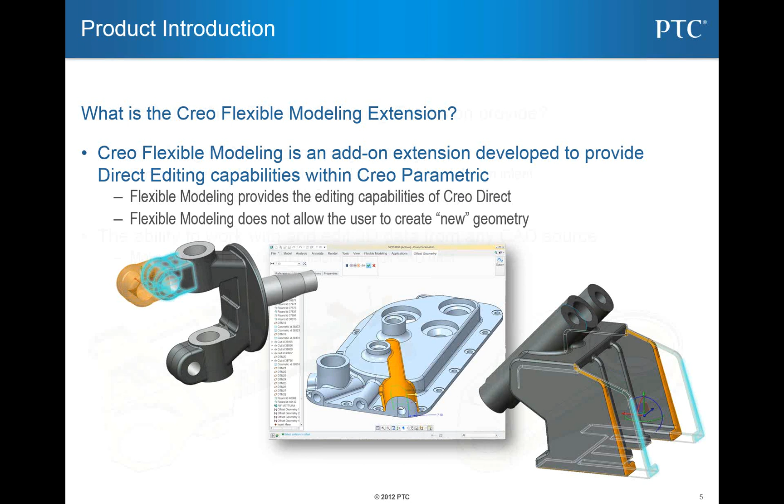Okay. Now, where does flexible modeling become a useful tool? Not only do I have the ability to alter parametric data, Pro-E and also Creo data, but I also have the ability to alter geometry from IGES files, SolidWorks files, CATIA files, whatever it may be. As all of us know, bringing in a SolidWorks file or an IGES file, fundamentally all of that is just dumb geometry.

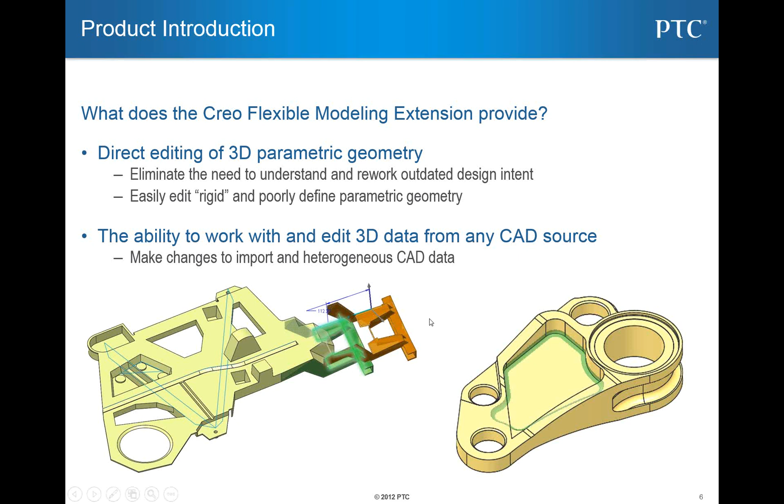So the ability to alter holes or rounds or those type of things becomes a very painful process, and that's what the flexible modeling extension helps you do. It helps you modify geometry. Again, not create geometry, but modify geometry, regardless of what type of data it is. Okay?

So where does this become useful? Again, what can it aid you in doing, right? What else can it help streamline, for lack of a better word, okay?

So a lot of us old school parametric guys are a little bit leery sometimes of the flexible modeling extension, right? But as we all know, editing geometry at a late stage in a design process can be difficult, to say the least. We've done all this engineering work on our part. We've created some type of relationship from one object to 15 other objects, and all I want to do is move that thing an inch one way. That can become hairy, especially if we're using relationships and all the other things that we can do.

So that's really where the flexible modeling comes in, is that it allows us to bypass all of those parametrics, even though we've built the parametrics into the model itself. Now, some of us will think that's a great idea, and some of us will be a little skeptical of it. But if you have a fit for it, it becomes a very big time-saving function that helps you get past something you weren't necessarily anticipating at some point in time.

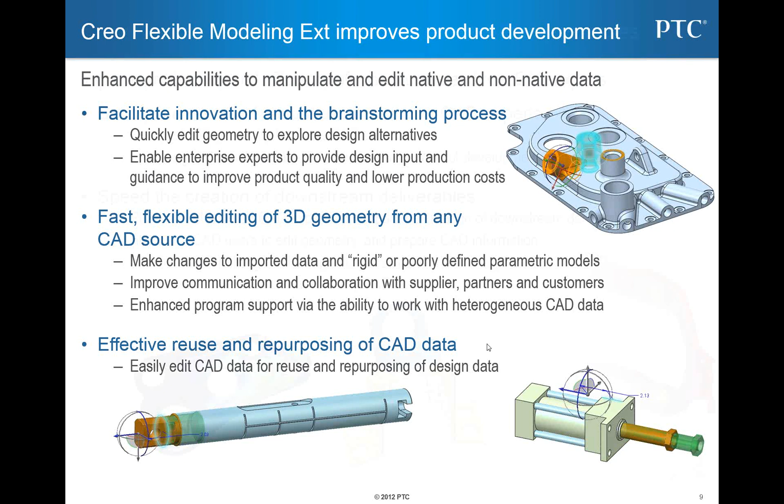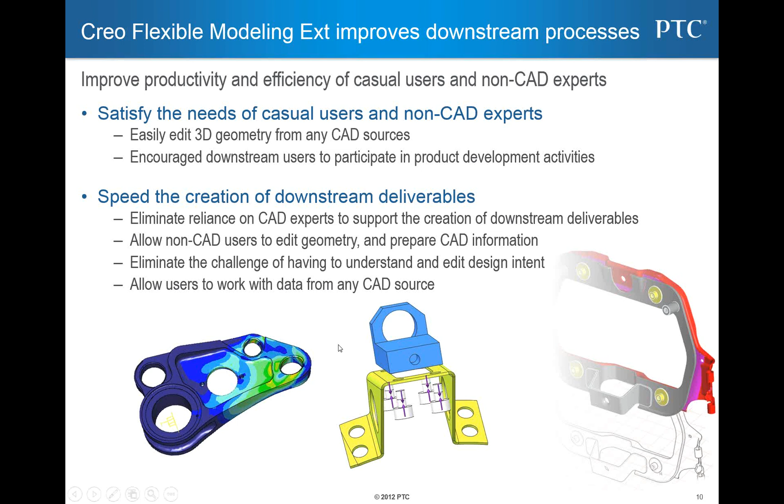All right, so I'll show some of this. This is more for the webcast, or you can pause this and read it at some point. But we'll also talk about, when we're doing some of our FEA work, we want to remove chamfers, we want to remove rounds. Whether that's parametric or IGES data, this is one of the things that the flexible modeling extension allows us to do. So just the back end of it here, and I think we're done after that.

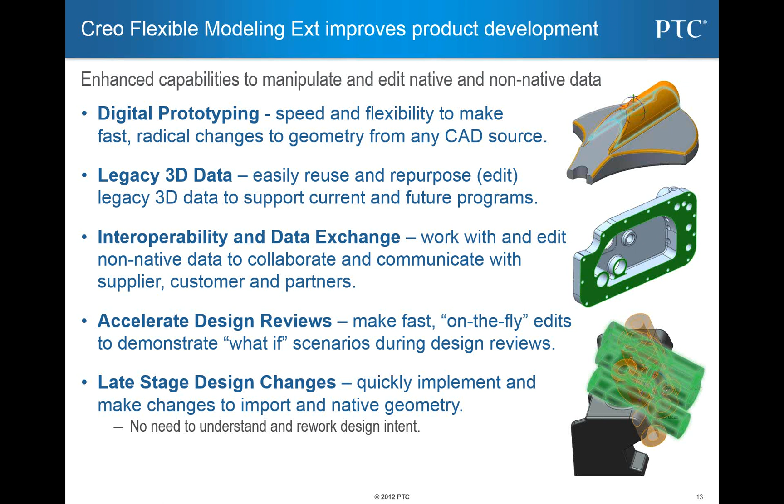So, digital prototyping: how can you change things very quickly without having to deal with the parametrics, even though we might have some in there? Flexible modeling tool. The legacy data, IGES, SolidWorks parts, whatever it may be, how you change them, that's the flexible modeling extension. So you see some of the ideas and concepts, and I told you I didn't want to bore you to death with slides, so let's get right into the software and you'll see what we're talking about and how this can help you out. I'll bring this back up at the end.

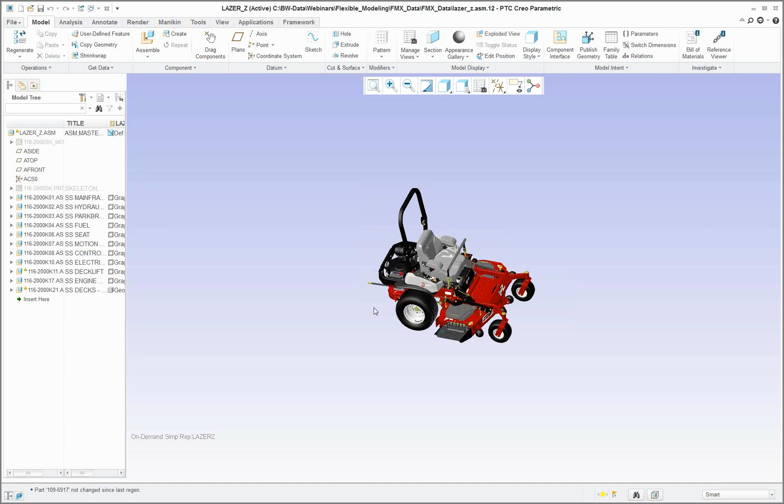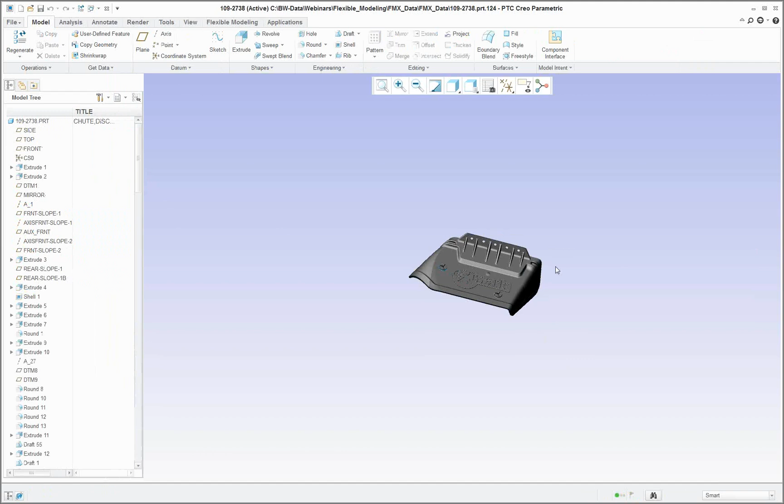So what I have here is a very typical assembly that, if you've seen a lot of PTC demos, you've seen before. It is the riding lawnmower, and it is actually a fairly detailed assembly. What I'm going to do is open this part that you see down here. There it is. And whether it's late stage design changes or whatever it may be, we're going to talk about how this works.

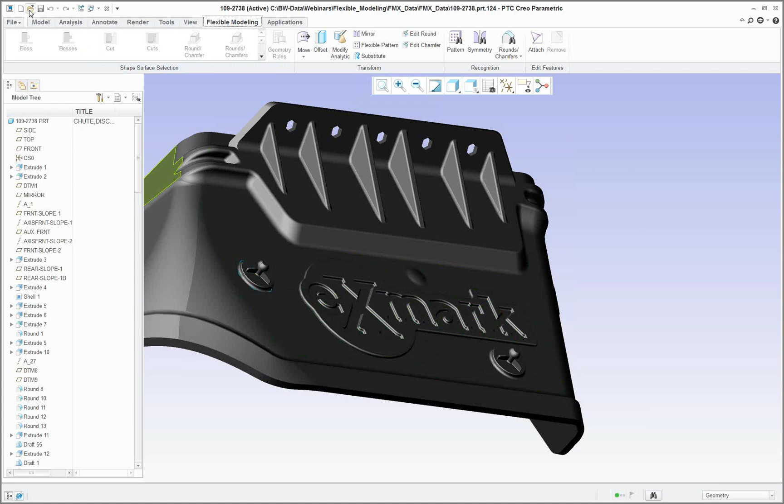What I have here is a very detailed, absolutely a Creo part, with a bunch of rounds and a whole bunch of things that go into it. And as we know, changing objects in this software, depending on what you're changing at what stage, can be kind of a headache for us. So up in the top is what is called the flexible modeling tool, with a bunch of functions. I also want to show this model because it helps us understand how things are selected and how it identifies objects when we're going to alter them. Even though it's a very simple model, it gives us an idea of how things work.

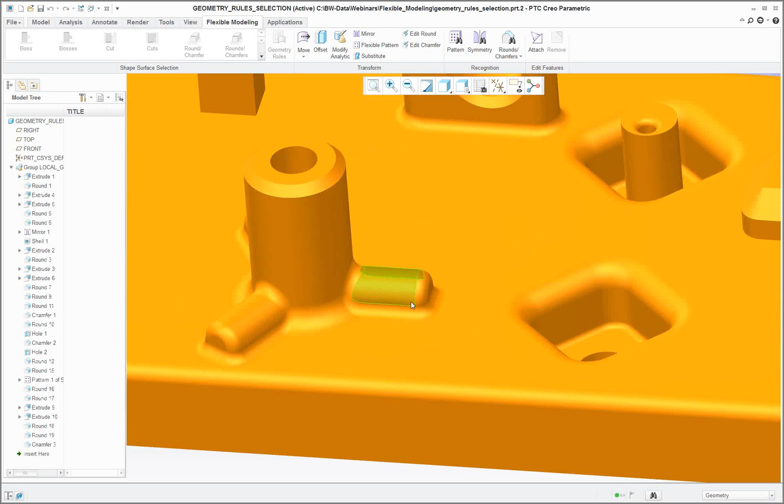Now, like we talked about before, this is another Creo model with all the relationships in it, and at some point I might want to take this entire peg right here and just move it an inch this way. Well, not understanding what all the parametrics are, and whether it's tied to this or that object, I just want to push it. So first of all, when you get in the flexible modeling tool, you pick the object that you want to move.

Pretty simple. Well, how does it understand what to pick? So what I'm going to do here is pick this surface, and what you'll see is that these guys right here start to light up and help identify things for you, okay? So what this does is it works off what is considered to be a boss or a cut idea, and then the ability to identify rounds and chamfers.

So this is more of a boss. So I want to pick this guy, and it says, do you want the boss in a simple standpoint or from the select surfaces, or do you want it recognized a little bit more? So I'll say I want the entire boss. Notice how it identifies that all the way down to the floor, okay?

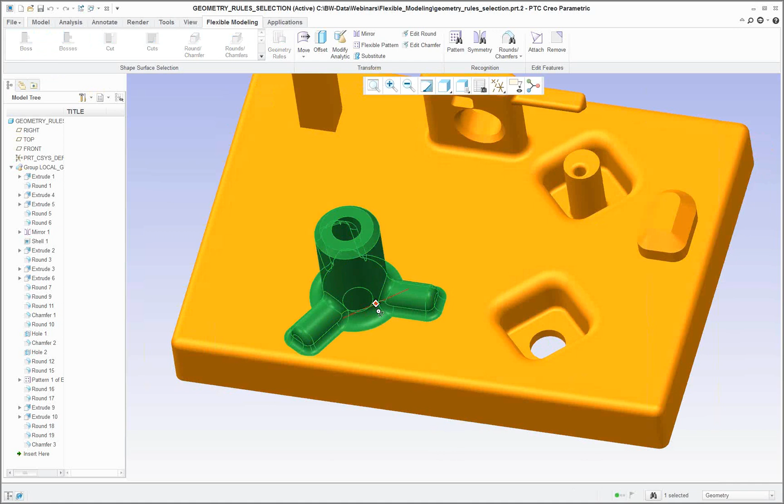At the same token, we'll look at it from this standpoint. I'm going to pick that surface right there. I'll say give me the entire boss, and notice how it recognizes all the geometry according to the boss. Now, let's say that we don't get all of it, okay? Let's say it can't recognize something because it's not perfect by any means, and I pick this guy.

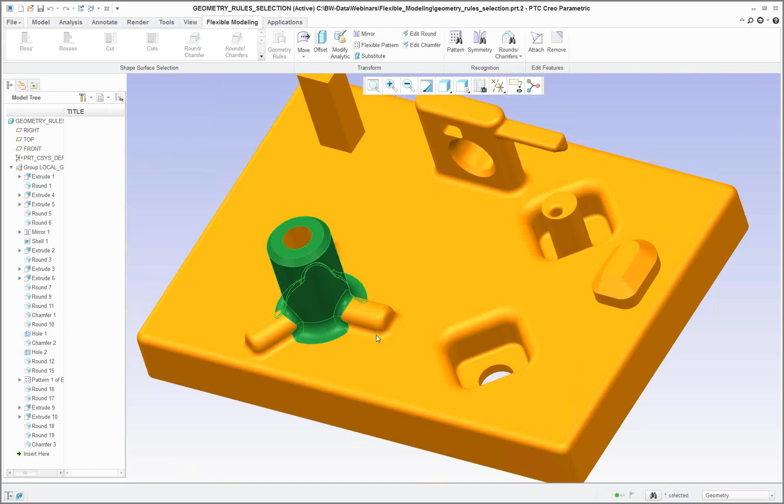I still, at that point in time, can just hold the control button and continue to pick surfaces that I want to add in to some type of move or change that I'm going to make, okay? So it's not like it's limited to the selection process that you see up here. You just hold the control button or the shift button, or for that matter, I can hold the shift button and get all of it anyway.

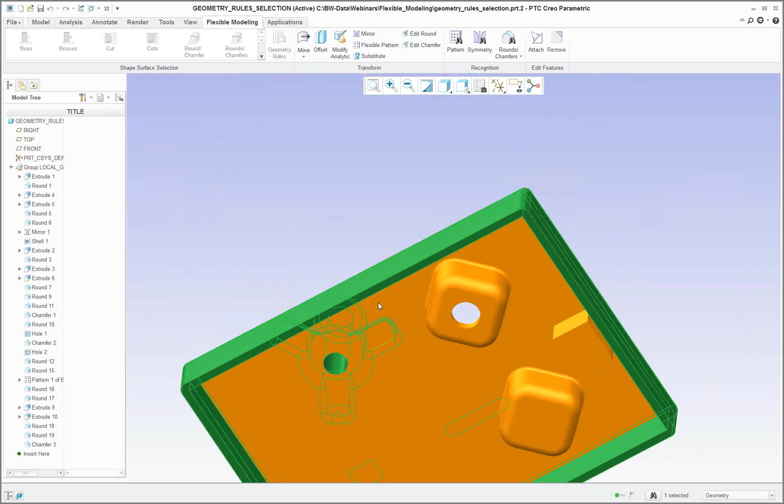Well, I guess there was a hole at the bottom here. There we go. All right. There it is. Okay. So you can still use the same concepts around the selection process and still use the flexible modeling functions, right?

But this selection of geometry becomes a big deal because, again, it doesn't always do the perfect job of what it selects, but you can always use the shift and control button to add in the surfaces or the geometry that you'd like to change, okay? So I wanted to start out with that to show you how things are selected and how we go through the selection process in general.

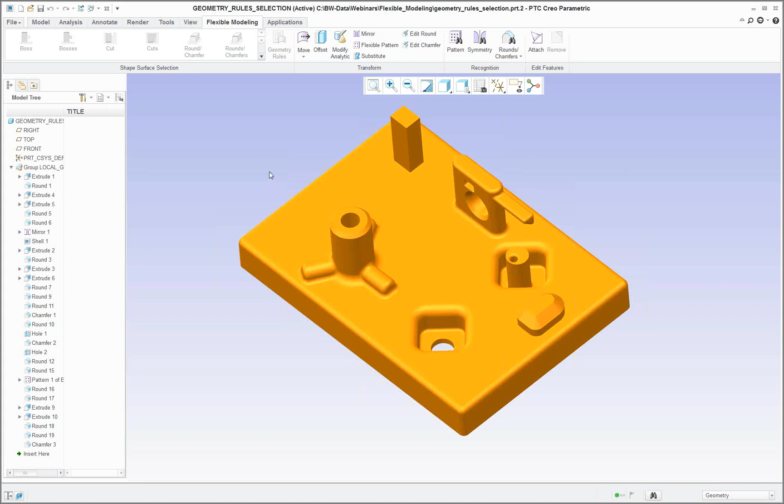All right, let's go back to that part. All right, here we go. So let's go ahead and make a change, okay? So what I'm going to do here is pick that surface right there. Let's see what it recognizes, right? It recognizes that. You know what? I want to add in the other ones.

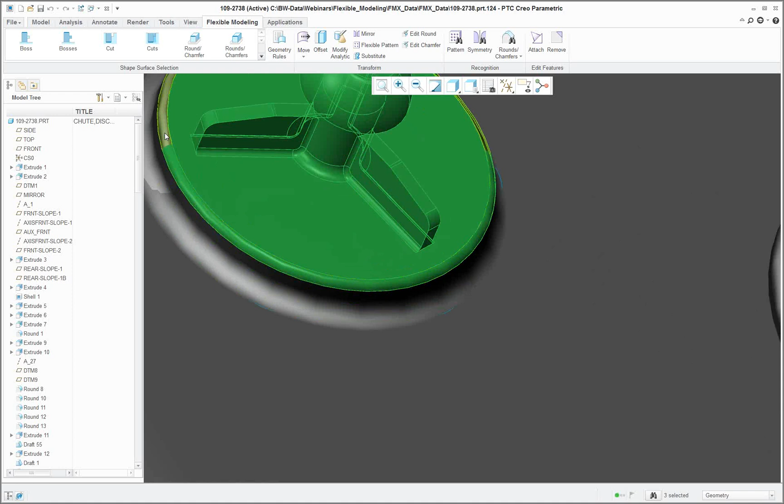So I'll hold the control button, pick some more geometry, pick the two halves. Everybody knows there's always two halves of a round, or circular objects, if you've been around Pro Engineer software, Creo software a long time. There it is. Notice on the back side, this is more of an injection molded part. It's not a shell. But at this point in time, I want to move this object around.

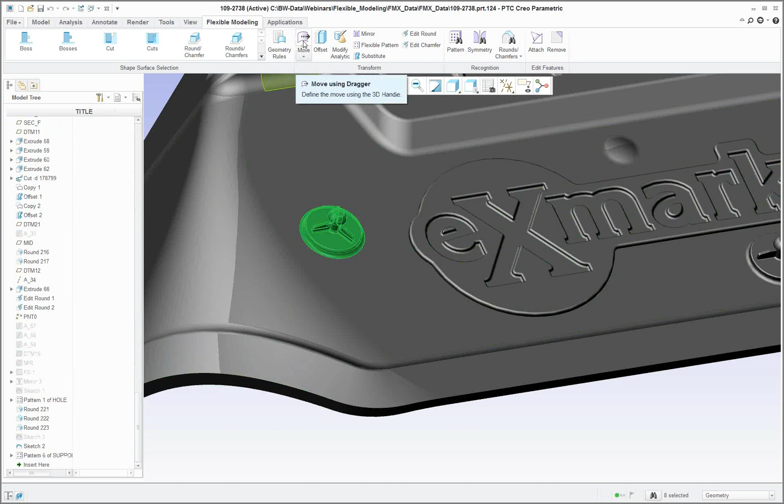Now, what you'll see here is at the bottom of the model tree, as soon as I actually do this, it's going to put in its own separate feature. So I'm going to say, I want to move this object. I am creating a direct edit on geometry. I'm not altering the parametrics. I'm just creating some type of direct edit.

So I'm going to hit the move button, and what it gives me, for those of you that have been using Creo, is very similar, right? The little gyrosphere right there. And what I'm doing is just altering this object, in this case, by dragging it around. Okay, there it is. And not only can I do that, but I also can drag it up and notice how it extends the geometry for me.

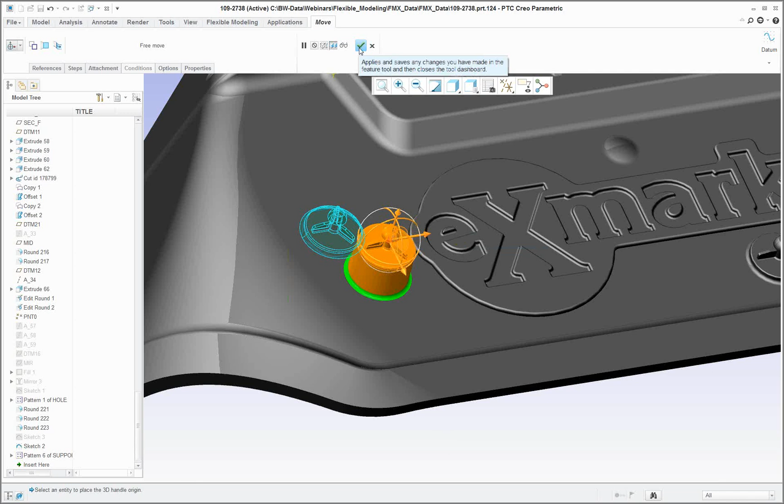Okay, so I just made a very heavy change to this object without going in and editing the definition of all the features and all the ties that you may have. So when I hit the button, there's my change, and I know that's kind of a goofy change, but that's okay. We want to see how it works.

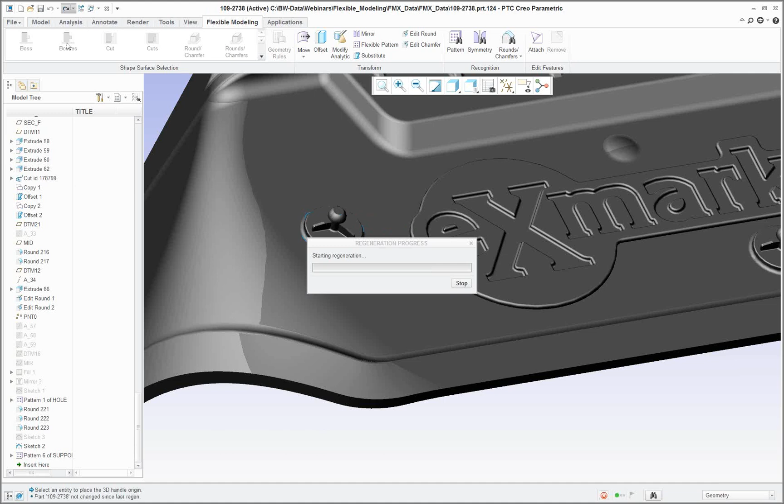But notice in the bottom of the model tree, what it puts is an actual move feature. Now this is no different than any move feature that you would expect. I can right click on it and suppress it. I can right click on it and delete it. I can use the undo button to grab it, or the redo button, I should say, to put it back in.

Okay, but the idea here again is that we are modifying geometry. Modifying geometry that is parametrically tied, but we're doing it with direct geometry edits. Okay.

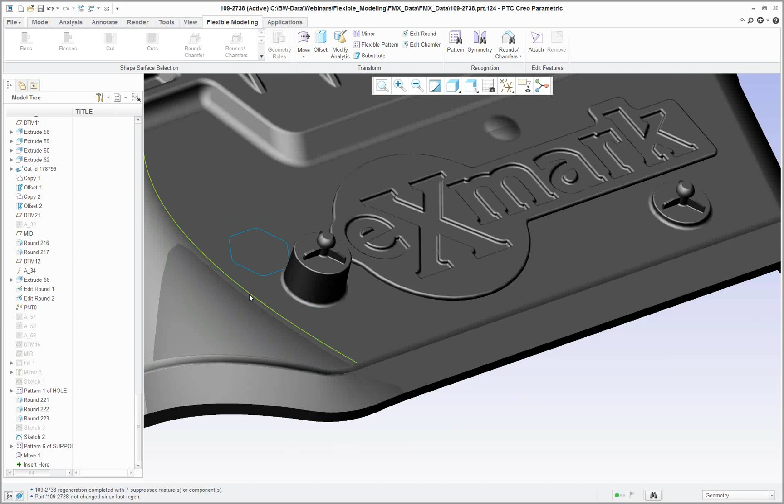Now, here's another little example of this. In this case, if I were to come in, I'm going to pick this surface. I'm going to say, all right, I'm going to pick the cuts. It recognizes that as a cut. If I hit the move button, that's fine. I can move it, and I can move it back and forth. But in this case, I don't want to move it. I just want to make it a little bit bigger.

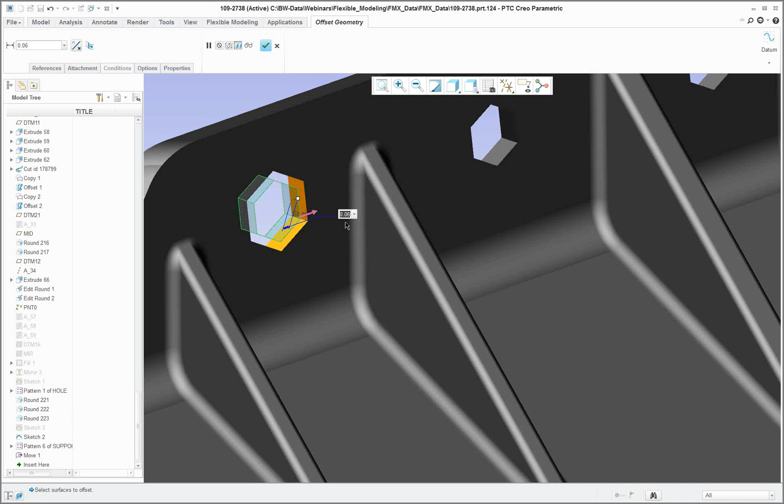Well, that's an offset function. So here's an offset. It says, how far do you want to offset it? Again, I can type in a specific value, or I can just kind of drag it around. There it is. You see the value that I'm putting in. See if we can take in the 0.1. There it is. And so I've offset that object now 0.1.

Now again, could you have done that in your parametrics? Probably, sure. But what if this was an IGES part? What if it was a STEP file? Now all of a sudden I have dimensional values that I can regulate and handle that way. So the concept of move. Actually, I'll do another move here in just a second based off of dimensional value. You can do that. It's not drag only. But you kind of get the idea of what we're doing here. We're not creating geometry. Really what we're doing is just modifying or creating direct edits on geometry that currently exists.

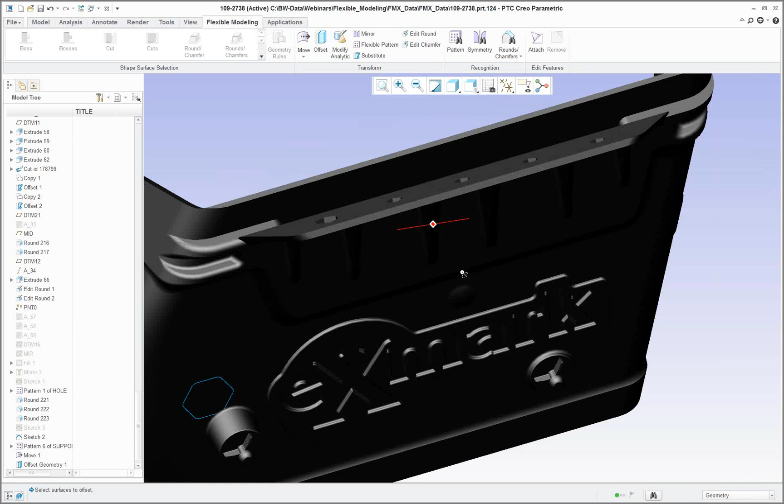So we can leave this guy alone right here, and let's get into some of these other little things that you see right here. What I want to do is drag our supporting fins around that you see right here. Again, you see it on the bottom, it is an injection molded part. I want to drag not the peg, but the little rib feature maybe to the left a little bit, but I also want it to have an effect on this guy over here because about the plane, all of this is symmetric.

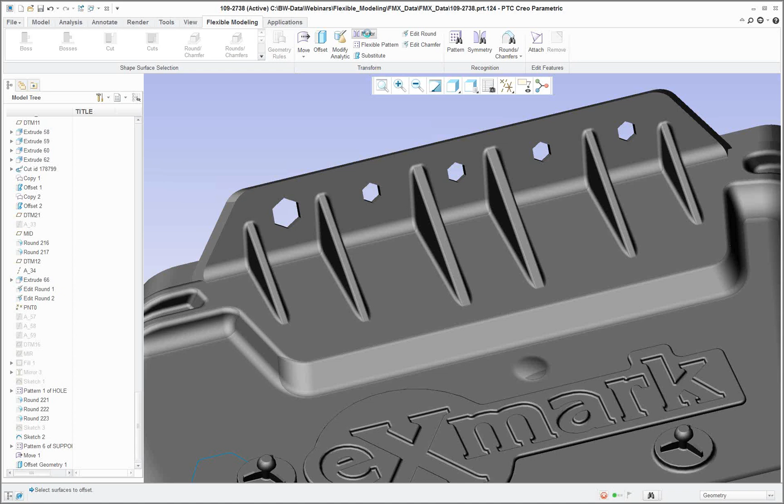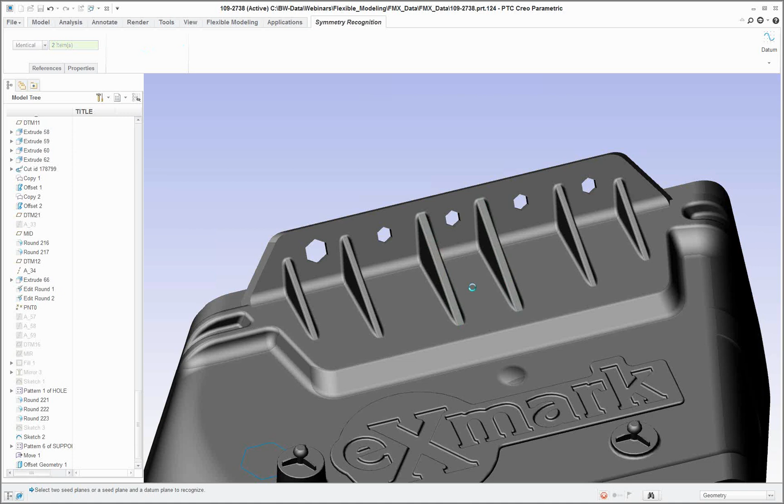So there is the ability to go in and create what is called a symmetric object. So what I'll do here is I'm going to say mirror. I'm going to pick this guy, hold the control button, and pick this one right there. Oh, sorry. Where's my symmetry at? Oh, there it is. Sorry, guys. Not mirror. Symmetry. All right, so I'll go ahead and pick this guy, pick this guy. What we're saying here is that those objects are symmetrical. Now, if you notice, when I pick up my symmetry, it actually recognized these other rib features as also being symmetric.

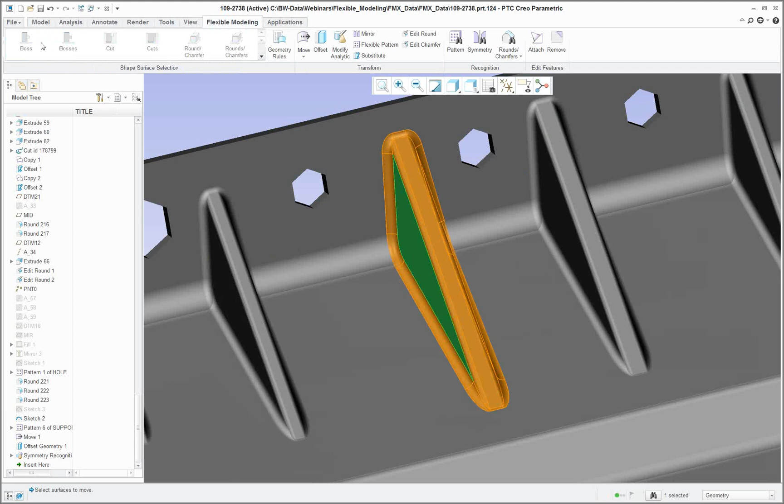So now, this time, when I come in and say I want to create a move, let's pick it first. There it is. There's my boss. I'm going to move it. But this time, under my options, there it is, I'm going to say I want to add in that symmetry right there. So notice how it recognizes the symmetry, and now when I drag this guy back and forth, you're going to see that the other object moves also.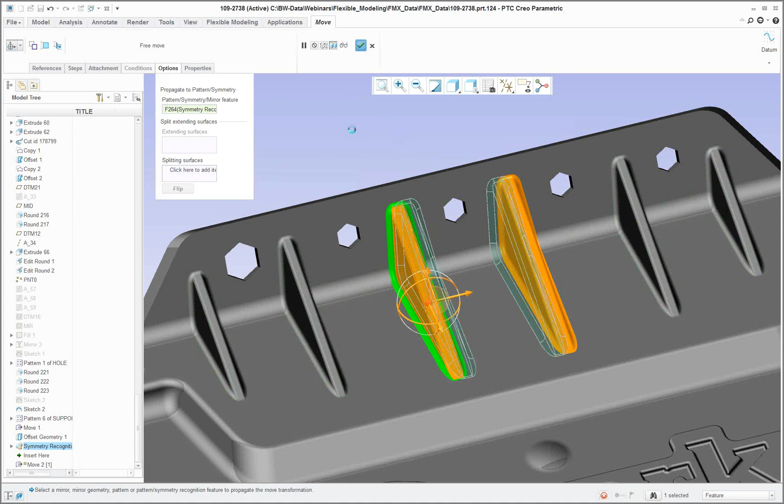So if I went in and selected these and moved, then this is going to be affected. Because again, what are we doing? We're really just dragging this guy around. In this case, could we have typed in a value? Sure. But I'm dragging this guy around and expecting the result on the other objects. So with the ability to create symmetry, I don't have to guess at how far I move this one and then have to do it over here. I don't have to duplicate that work. I describe the symmetry and then I go from there. So there's my move. There's essentially what is considered to be the symmetry concept.

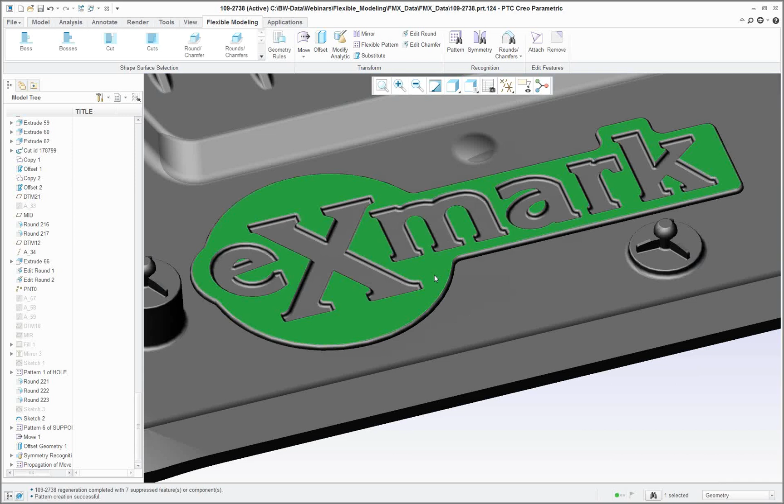Now, beyond the ability to modify objects, you also can do things like remove. And this becomes fairly powerful because you can do a lot of different things with it. So in this case, I'll say I want to pick this guy. We're going to pick all of the boss. There it is. Again, it recognizes the entire logo, and I'm going to say I want to remove that geometry. Let's see what we come up with. Hopefully it doesn't take too long.

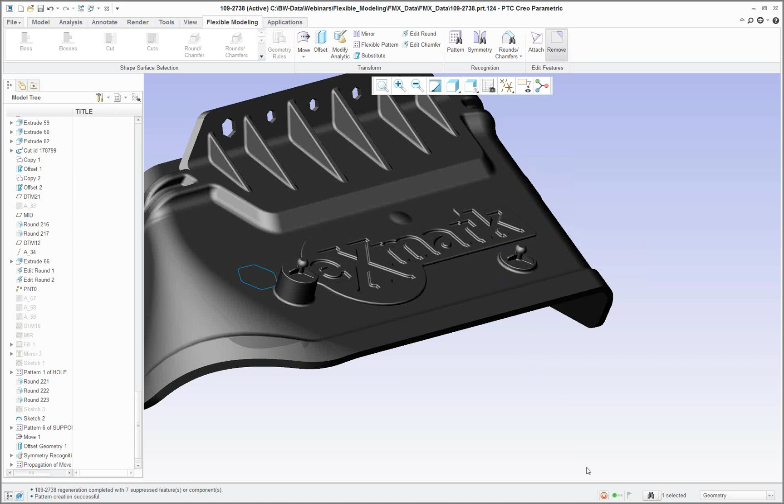One thing I have noticed is as it's trying to recreate geometry, there is this little kill button down here. Essentially, because it is creating quite a bit of geometry, as it's working, if you go ahead and kill this, I guess this is maybe a good time to do that. There it is. It will actually stop what it's doing, so you can get rid of that.

Maybe we should try our remove on a little bit different feature here. Our next one, maybe that's taking a little while to regenerate, but I'll show it to you. That little X button down at the bottom there actually stops the process and allows you to hop back in and keep going, right? Because sometimes it can take a little while to get through that. So I guess because of that, that's a good thing to show you.

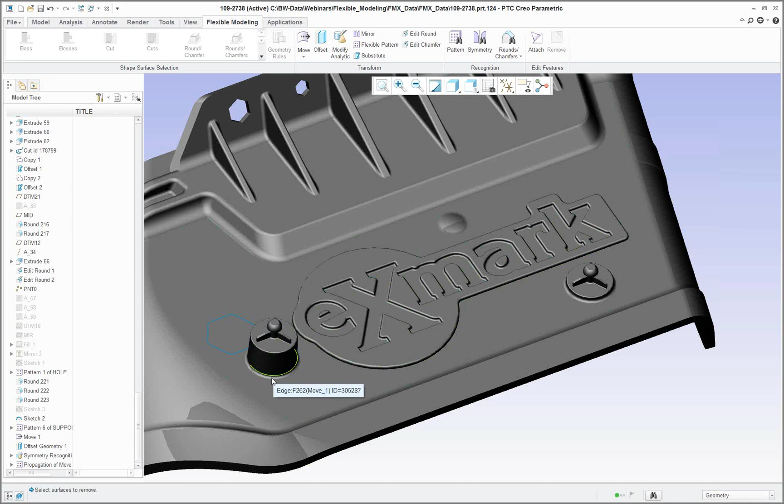Okay. Now, we know from a removal or an editing of round standpoint, from a parametric concept, you find your round and edit it. But let's do this in a little bit different situation, something where we don't necessarily know the value or there are no features involved with it. So I'm going to go ahead and open up an IGES, or in this case a STEP file, or maybe it is an IGES file. I don't remember. There it is. Let's go ahead and open up that right there. It is, again, an import object. There we are.

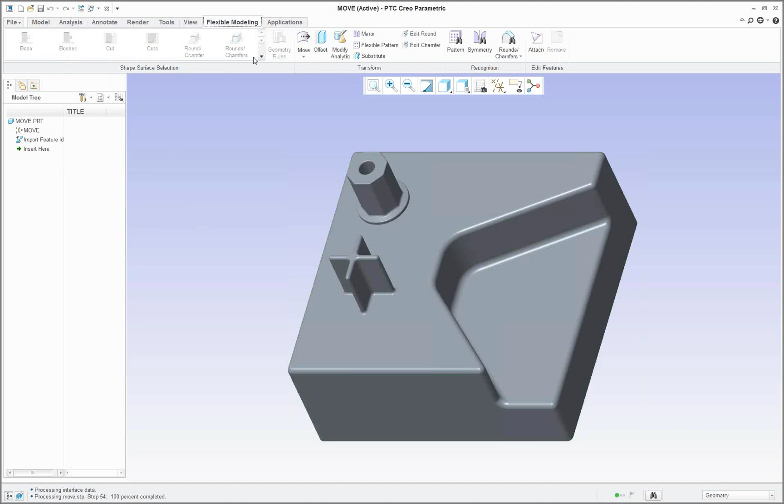Fairly straightforward, I get that. I know it's not overly complicated, but it gets the point across. Again, get into the flexible modeling button, and at this point, let's go ahead and do a remove now. So I'm going to go ahead and pick this round. There it is. I'm going to say, give me all those rounds. Notice how it didn't pick those up. Again, we could manually pick those just by holding the control button. But I'm going to say, I want to remove those objects.

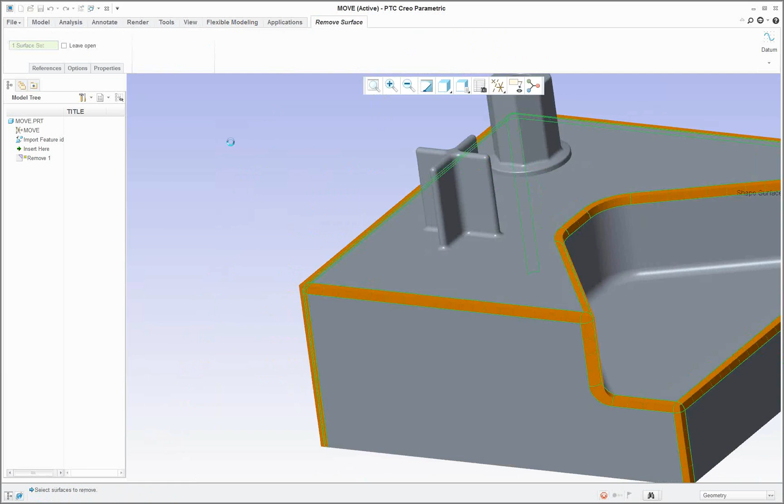Notice what it creates. See how it gets rid of that round? Right? I say, give me the check mark, and I just remove the round. What does it give me in the model tree? See how it gives me a nice remove feature. And again, if I wanted to back out of it, I just pick it, say delete, and then go from there.

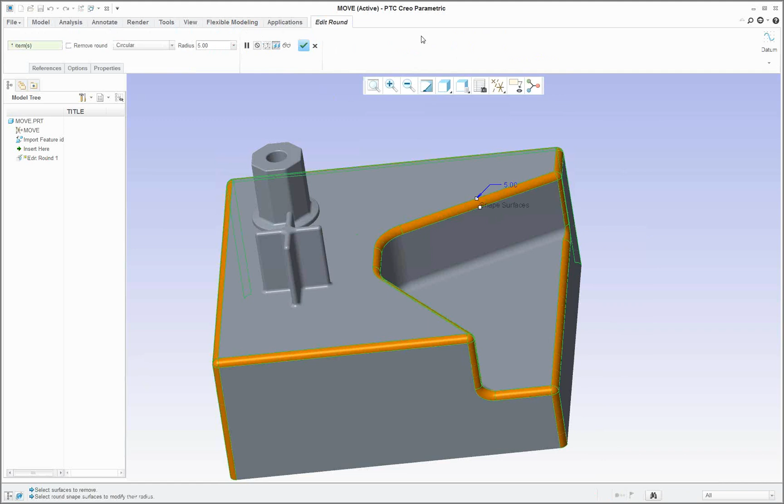Now, what if we want to edit the round? What if I want to change that round? I can change that round. Again, pick this round right here. We'll say we want all those rounds. And at this point, there's an edit round function, I should say, not necessarily feature. And again, I could go in and drag these back and forth if I wanted to, or type in a specific value. There it is. Say OK. There it is.

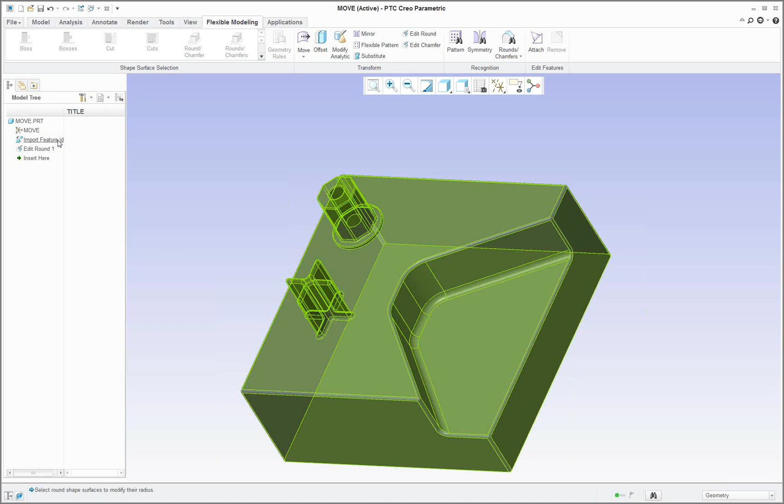And now, again, what have I done? If you try to manipulate, as I stated before, it's fairly impressive. Notice how I went in and said, all right, I'm going to alter the geometry. I just modified a STEP file, I think in this case, I've altered that geometry, which everybody knows you just really can't do unless you're using something like flexible modeling, okay?

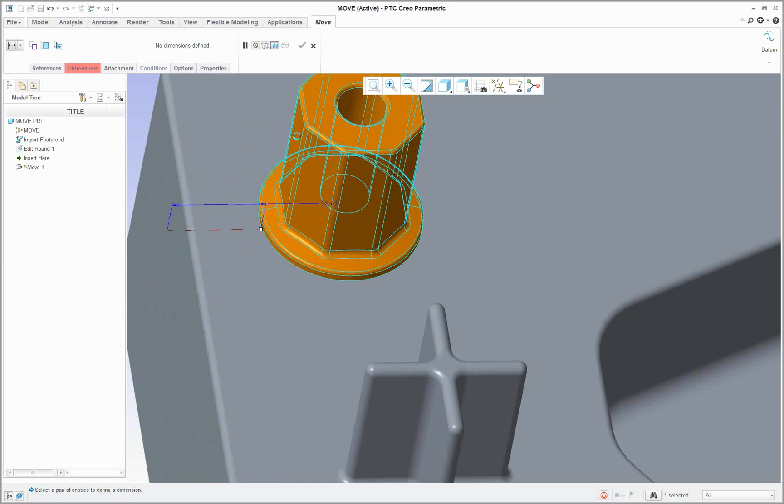Let's look and see how geometry adapts in certain cases. So again, pick the surface. I'm going to use the entire boss. In this case, let's use the dimension. I'm going to say from this surface to that surface. Notice how, again, there's the dimension. Notice how it also drags along. Let's see what happens when it encounters an edge. See that? See how it pushes that?

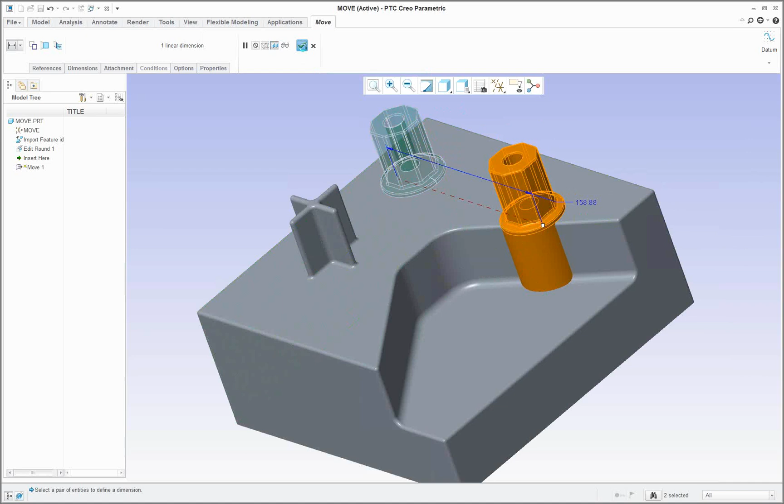So even though we talk about it not creating geometry, it is altering the geometry in this case. So now it pushes down to the edge. I have a specific value that I can type in, and then when I'm done, I go ahead and hit my check mark button, and you can see that. Again, if I didn't want to do that, I just go back and pick my move feature and delete it that way also. Okay.

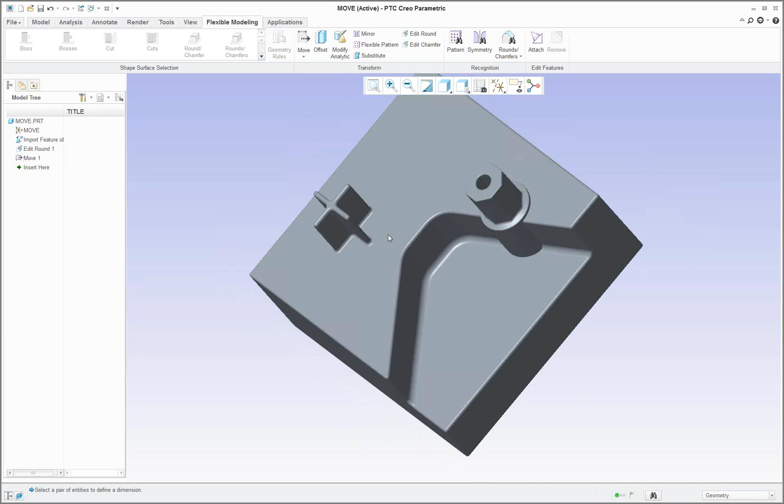All right, so fundamentally we've covered most of the functions here. I'm going to do a substitute in just a second, but that really is what the flexible modeling tool is. Now, one thing we didn't cover is this pattern, and I don't know if I have a good situation for this, but let's go look at this.

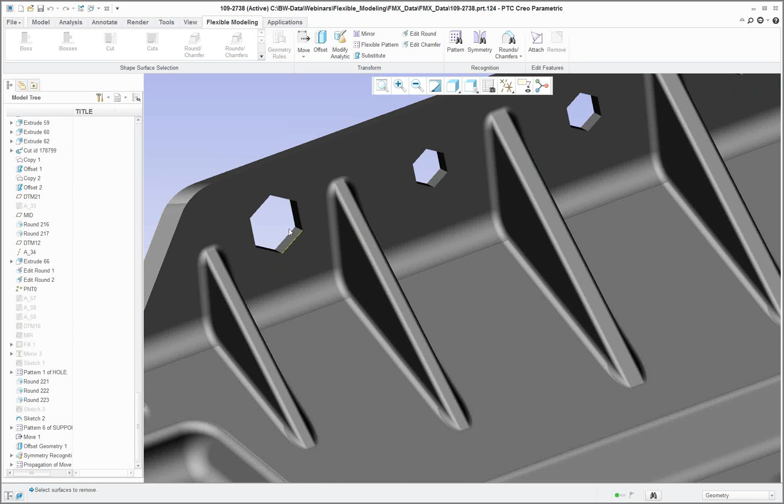Let's say, for instance, we have to kind of pretend here, that this is an IGES file, so we don't have any patterns, right? We don't have any of this stuff. You see this pattern right here. What I have the ability to do is, if these were just IGES data, I can pick these guys right here. Once I pick it, I can say I want to recognize a pattern.

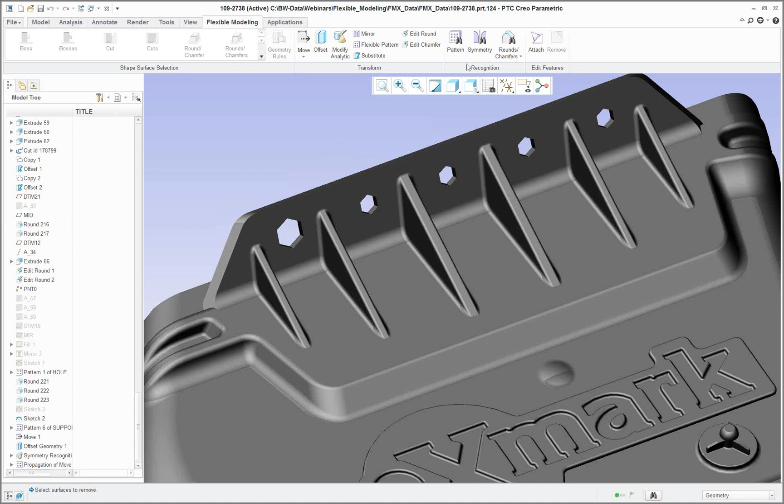What it will do is recognize these objects out of pattern, and then at that point in time, just like we did with the symmetry, if I alter this feature or this piece of geometry, as I make those changes, the pattern recognition will pick them up and alter all the rest of these four right here, just like we saw with the concept of symmetry. So again, I don't have a pattern, but it works very similar to the way it does within the symmetry concept.

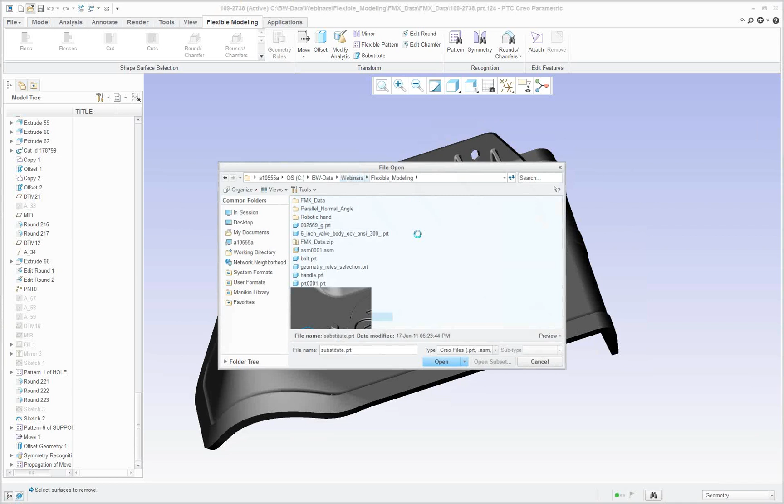All right, one other thing that we'll do here. We'll open it, it's kind of cool. Actually, if you've worked with some surfacing stuff, you might have seen this every once in a while. It's the concept of substitute. There has been a replace tool within Creo for quite a while, but essentially in flexible modeling there's something very similar called substitute.

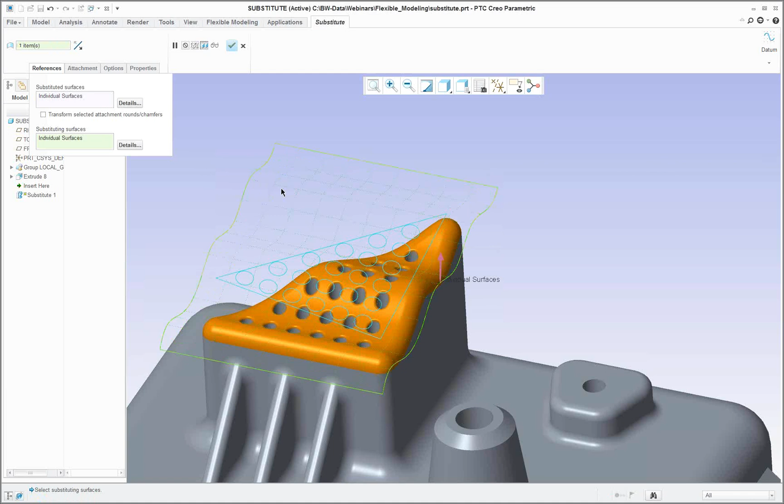So what I'm going to do is pick the surface that I want to substitute, and then pick the surface that I want to substitute it with. There it is. Let it work, hopefully we can get done with this one. There it is. Now what's cool about this is notice how it recreated all the rounds.

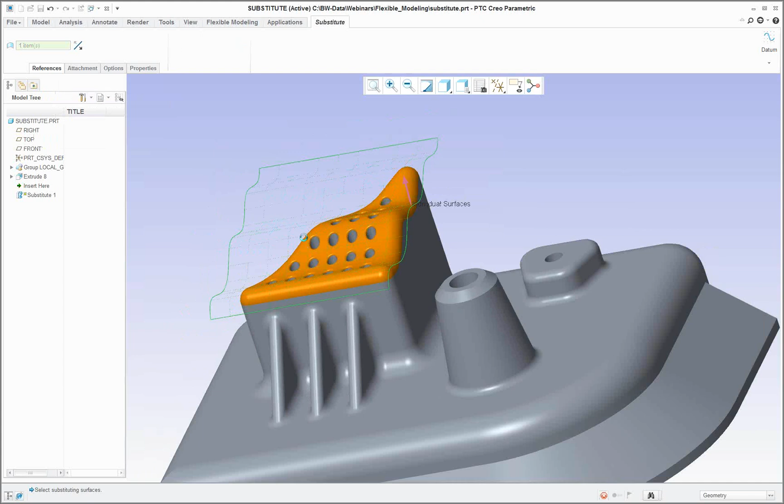If I were to do this with the regular replace tool, it would just cut it off. I'd have square edges, not only here but at the holes themselves. But I think that's actually pretty powerful, right? All I have is just a regular Pro E extruded surface. I pick the surface that I want to essentially remove or substitute, I pick the object I want to substitute it with, and then the end goal, there it is.

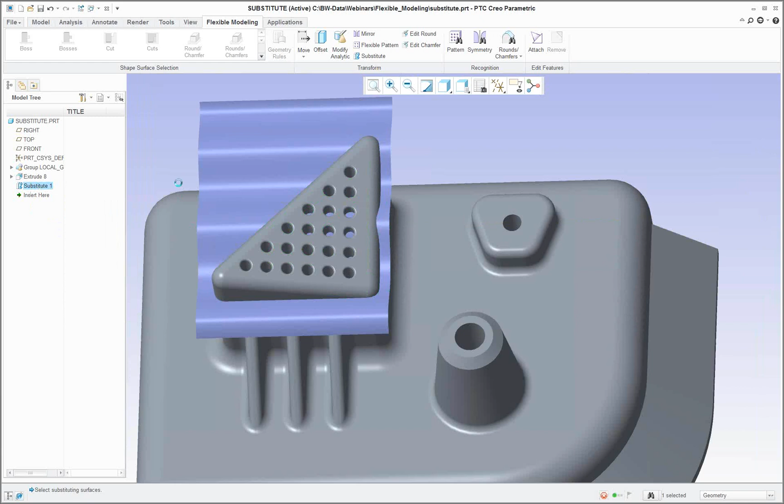And I don't have to recreate all of those rounds. If I had cut it off before, I'd have sharp edges, I'd have to put the rounds on, I'd have to rebuild all the rounds here. And again, in this case, it built all those rounds. If I go back and look at this, there it is. Notice how it says recreate round, create round and chamfer geometry, fundamentally just recreating them again according to what they were before, right?

So there it is. One other thing that I was going to do, let's see if I can get this to work the way I want it to. There it is. All right, if I go over here, notice how when I pick this surface right here, we'll just do a regular move with the dragger. Notice how when I pull this out, it's smart enough to recognize and extend that surface.

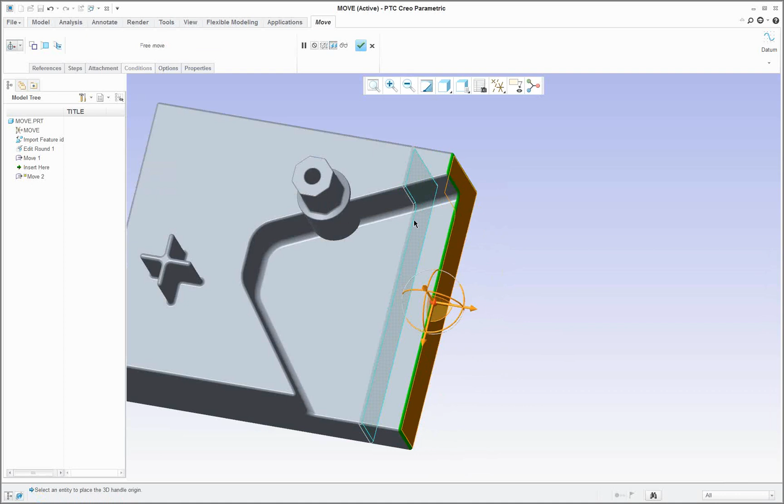There are a few other things you can do here. Let's see where that is. Extend, attach, move geometry -- there's a few buttons here. I can't ever figure out all the buttons I have here. There is a button where if I create... let's see here. There's one button I'm looking at, let's remove that, I think it's this guy right here. It is, maybe not. Let's see if we can get this to work. Yeah, okay, let's do that one more time.

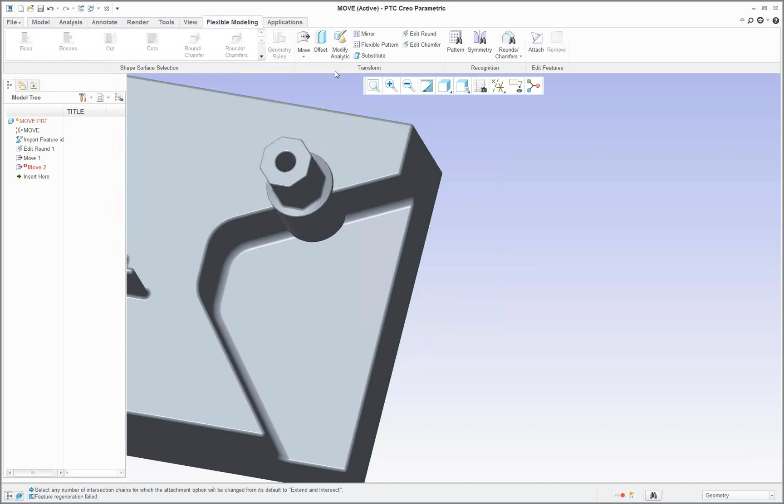Move, pick it. There's the extend under the attachment. There it is, there it is. What I'm looking for is a button that allows me, instead of extending along a surface, to actually stop it at that point in time, and it extends essentially perpendicular to the direction I have. I can't remember exactly which one it is, but it allows me to do that here, and then instead of moving along the surface, it moves perpendicular to that guy right there.

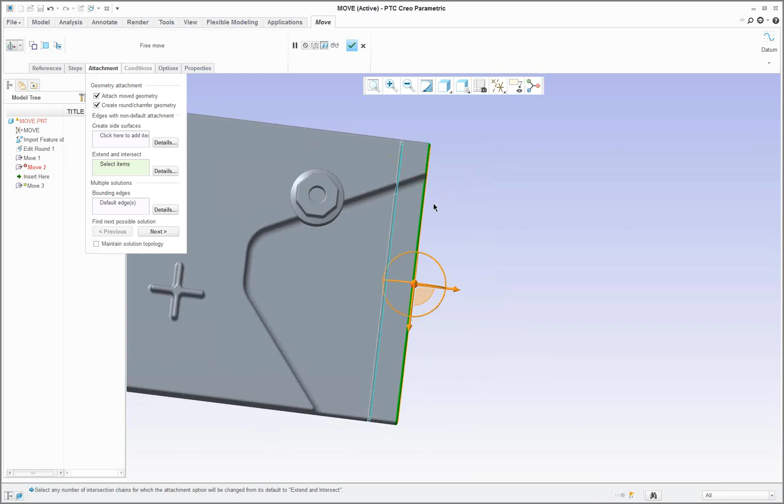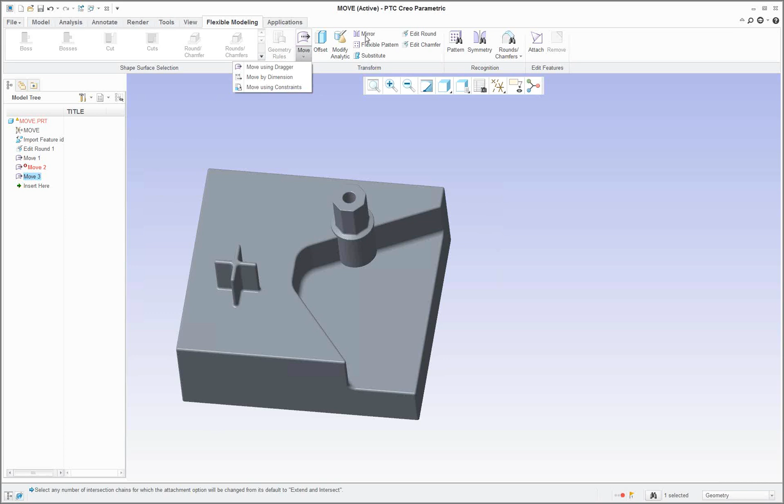All right, so fairly simple functions and ideas that you see within the flexible modeling tool. We've pretty much covered most of the buttons within the flexible modeling tool and how they work. Again, the remove button, the symmetry, the mirror - it says the objects are mirrored across the plane. As I move one, I have one also created on the other side.

Modify analytic - if I hit the modify analytic button, it's very similar. There it is. Notice how I move the hole. Oh, I forgot about this - notice how when I move the hole, the round updates essentially move right along with it. We don't have to recreate that. There's the modify analytic. The analytic is based a little bit more off of specific shapes, cones and cylinders. And then again, we covered the offset, and then we covered the move concepts.

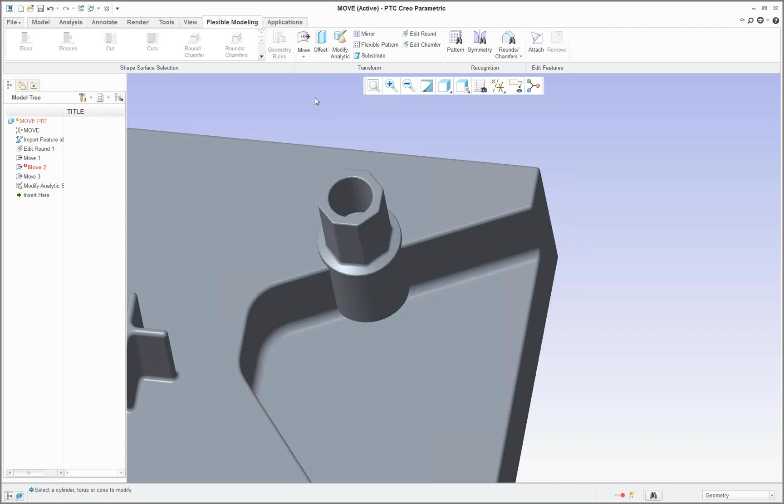Now, the last thing - and this is more of a talk than anything else - but essentially the flexible modeling tool is limited to the complexity of the surfaces that it's actually creating at any given time. I have seen some situations where the geometry just can't be constructed because you have a lot of different radiuses coming into a corner and some kind of crazy stuff going on. But that is kind of to be expected, right? What we're trying to do here is get a direct geometry at it, but have that geometry adapt to what is around it.

There have been cases that I've seen, and I don't have a good example of it here, that essentially the geometry is so complicated that we're trying to move a few different surfaces and it just won't create. I've run through that with a few different customers, and I've kind of shown them the limitations - obviously the benefits, but also limitations of the software, because I think that's also fair to show.

So if you're ever interested in something like this, we as a company, I've always kind of shown that as a demo. Give me a few parts, I'll show you what it can do, I'll show you what it can't do, and it just kind of helps you make a good evaluation on how the software could benefit you.

So flexible modeling, fairly simple tool, fairly simple functions. We saw just about everything that we needed to see, or at least its capabilities right here. And at this point in time, we would open up to...

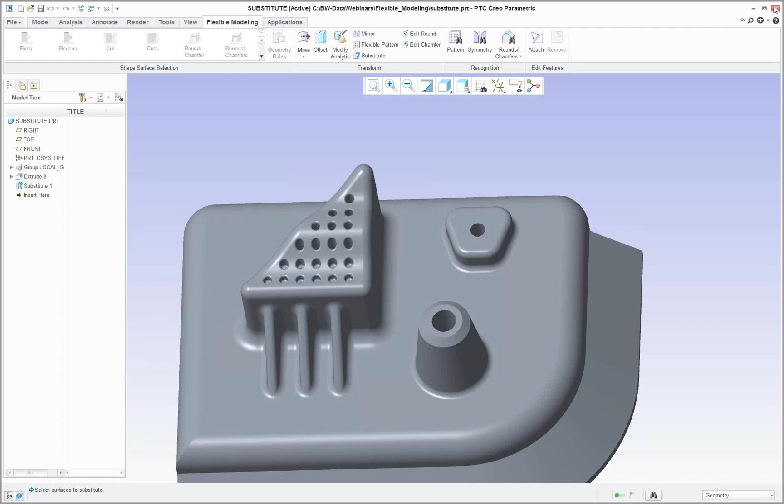The last thing I'll do here is for myself, and then Matt might have a few closing things that he'll put in. There it is. Let's shut some of that stuff down. For whatever reason, my little toolbar won't come up. There we go.